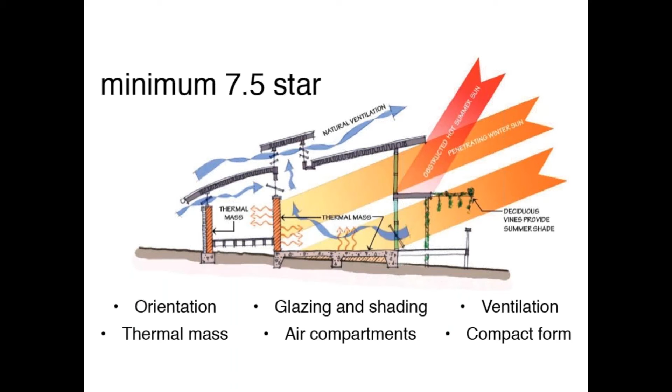This weakness in the system can be addressed with a few relatively simple measures, and they were measures we employed for the Mullum Creek eco-housing project in Donvale, Victoria. So there we required that energy ratings to 7.5 star be undertaken using AccuRate and by one assessor, for which we nominated an independent and rigorous assessor for all homes across the estate.

And once construction was underway, we provided lot owners with a free inspection service to ensure that the thermal performance that was designed into a home was carried through to the final constructed outcome. So both the energy assessments and the construction overview were generously funded by the developer, and that's a family of environmental philanthropists. So Sue, Steve, and Danny Matthews.

In cool, temperate climates like Melbourne, it's not easy to achieve a genuine 7.5-star energy rating. So that's a thermal performance that almost halves the space heating and cooling requirement that's attached to the nationally mandated 6-star minimum that you'll all be familiar with.

We found that homes with anything other than a compact architectural form and a modest amount of well-orientated glazing struggle to reach 7.5 stars without all of the following design features in place. They need to have high levels of insulation in external walls and roofs and ceilings. They'd need double glazed windows with high thermal resistance and high solar heat gain coefficient, so that's for Melbourne's climate.

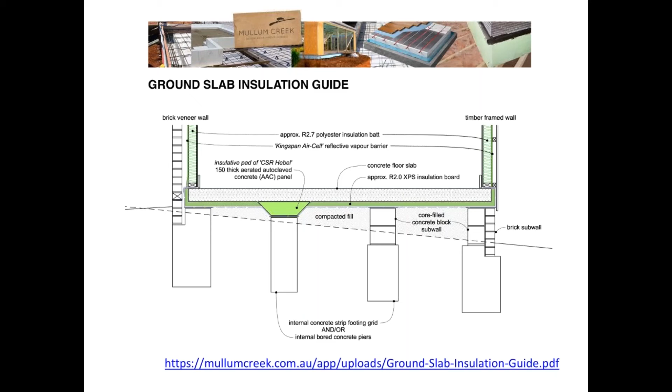Okay, so what about building materials? A report was tabled by the World Economic Forum in Davos in 2018, and it put the world's consumption of materials at above 100 billion tonnes a year. And that quadrupled since 1970. And meanwhile, the population over that period only doubled.

Between 2016 and 2018, this consumption of materials had jumped by more than 8% in just 2 years. Yet the reuse of materials had fallen from 9.1% to 8.6% of all the material that was consumed. According to the CEO of Circle Economy, Harald Friedl, who tabled the report, "We risk global disaster if we continue to treat the world's resources as if they were limitless."

Now, the lion's share of these materials, nearly 40%, is turned into housing alone. The World Green Building Council also tells us that of all carbon emissions attributable to the built environment, 28% are embodied emissions that mainly relate to the procurement of materials used to construct buildings.

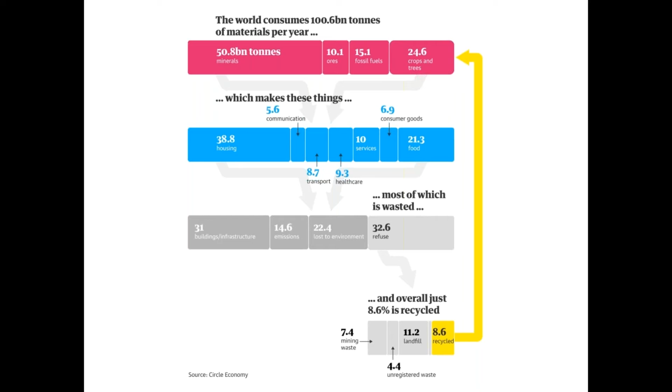There are no really clear figures for Australia on this, but from eTool outputs and the work of André Stephan and Robert Crawford at Melbourne Uni, I'd like to suggest that the ratio between embodied carbon and operational carbon in Australian building stock is even much higher than the global average that I quoted before.

And that's because the floor area attributable to each occupant in our homes and our workplaces, as well as the volume of vacant buildings in our cities and at our holiday destinations, are higher than almost anywhere in the world. You can see from this infographic from Stephan and Crawford that as building size per occupant increases, operational energy use increases as well, but at a lower rate, and that's as you'd expect.

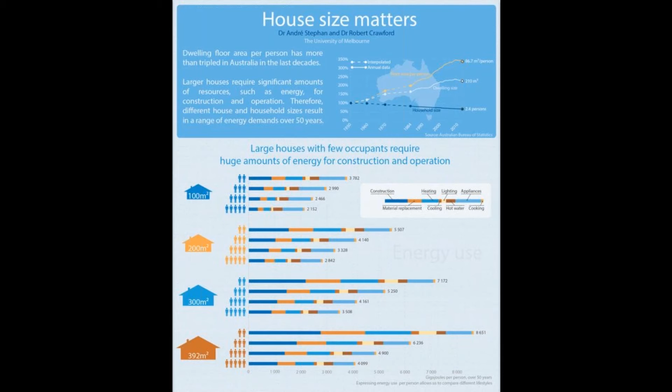Secondly, we have a relatively benign climate through most of Australia, and that moderates heating and cooling loads. And thirdly, our newer habitable building stock in Australia generally has better thermal performance, appliance efficiency, and maintenance than that in much of the developing world, where construction has charged forward to lower performance standards and at a blistering rate.

Per square metre of floor area, and I'll stress per square metre, it's fair to say that the operational energy and water efficiency of buildings in Australia is slowly improving. What this means, though, is that the materials used to construct them remain the primary driver of the overall life cycle environmental impact.

So services and appliances can be upgraded to embrace new technologies and to provide improved energy and water efficiencies through what needs to be, these days, a long service life for all buildings. But our specification of building materials commonly comes with more serious and immediate environmental impacts that are irreversibly locked in as construction begins.

So if you're building a home today, say a 6-star rated home, sort of the nationally mandated minimum thermal performance, you can see here the overall life cycle environmental impact and the relative components of each. So a good half goes into construction and repairs and maintenance, and then the other half goes into operational emissions and energy use for the life of the building.

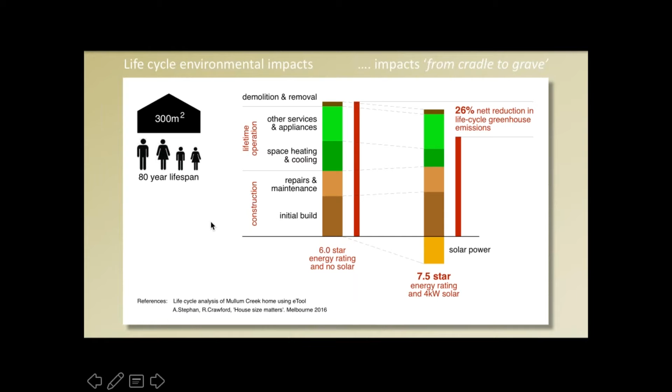Okay. If you believe the science as it's presented to us, what matters most now is how deeply and quickly we arrest CO2 emissions and biodiversity collapse. If we don't move mountains in the next 5 to 10 years, our future on this planet will be very bleak indeed. It'll be very hard for us to play catch up to get us back to a livable climate.

So if you have a new building in design on your desk, its overall environmental impact across the next 10 years, this period of emergency like none we've ever faced before, will be tied almost entirely to its construction, because its life cycle operational impacts will have only just begun to take effect in that period.

There are tools available to measure and verify life cycle environmental impacts, so embodied and operational impacts, such as carbon emissions, water use, toxicity, ecosystem degradation, from cradle to grave. You'll have heard of those terms. There might be some terrific ones out there, but those that I've engaged with can tend to draw on inflexible assumptions about the future. They can produce quite different outputs from the very same entry data, and they result in reports of only limited benefit considering the time and money that goes into them.

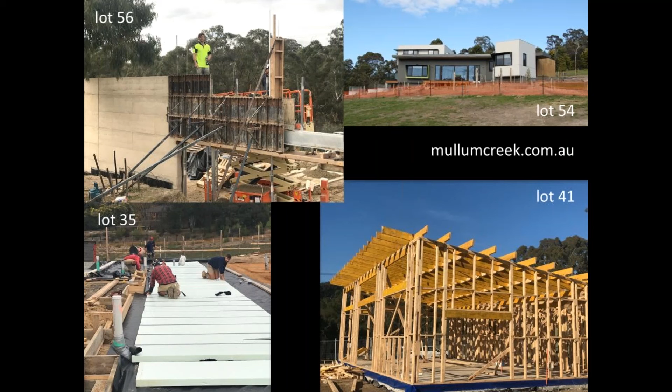So let's start with cement and concrete. The World Green Building Council, Beyond Zero Emissions, and other respectable sources all agree that the manufacture of Portland cement accounts for a whopping 8% of the planet's greenhouse gas emissions. So roughly the same globally as the entire transport sector. It's hard to believe, but it's true.

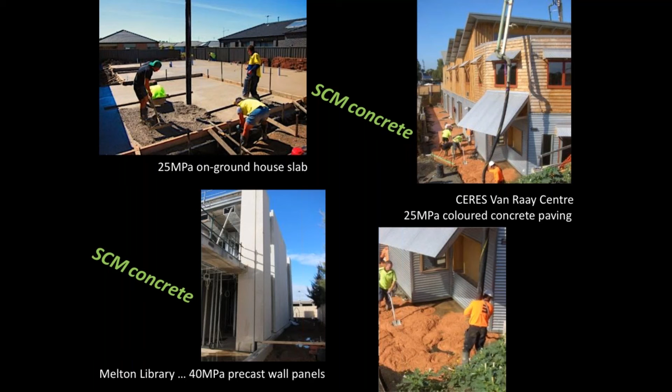But there are alternative, equally effective and readily available concrete binders, such as fly ash, which is a waste from coal-fired power generation, and slag, which is a byproduct or a waste from steel smelting. These alternative binders are collectively referred to as supplementary cementitious materials, or SCMs, and they're now readily available. The Mullum Creek Design Guidelines required that SCMs make up a minimum 30% of the cement used in wet mix structural concrete. And some architects and engineers chose to increase that up to 60% where surface finish wasn't critical.

As construction commenced on the estate, we found that more and more local batching plants were supplying concrete with SCMs with no increase to supply cost. In time, this concrete with SCM should be considerably cheaper, because slag and fly ash are problematic industrial wastes that are otherwise expensive to dispose of.

Also these days, we're going further and further from our cities to source virgin rock and sand for our concrete. The sand can't be weathered and rounded in the way that beach and desert sands are, where most sand comes. The sand for concrete needs to be angular to create a good structural matrix. And so it's surface mined from recent sedimentary deposits that lie beneath often delicate natural landscapes. In the global context, it's acknowledged now that we're about to simply run out of virgin angular sand.

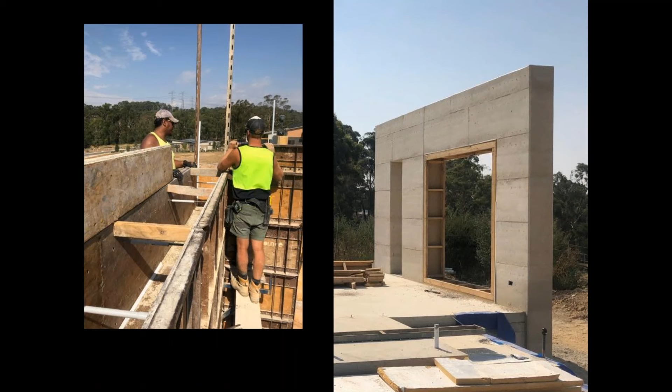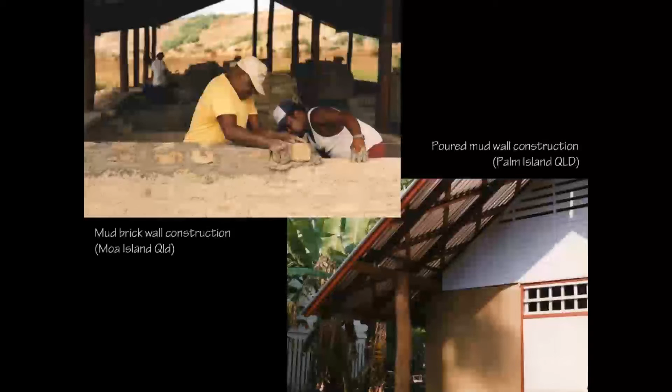When I was a young bloke, we built a lot with rammed earth and with puddled mud. We put effort into selecting and blending aggregate with the right gradation of particle size and colloidal content to achieve good strength and weatherability for walls without the need for cement at all. We followed the CSIRO National Building Technology Centre's Bulletin No. 5, and that's on earth wall construction. And we did the old-fashioned thing of erecting test panels before proceeding with every build.

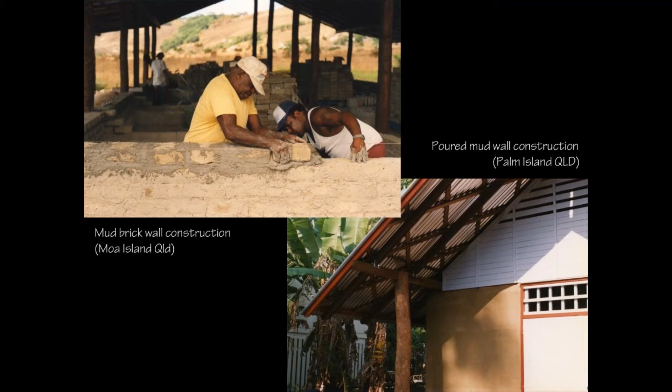What about steel? I think there's nothing wrong with a sheet of corrugated iron. Coated steel wall and roof cladding provides an expanse of robust and almost maintenance-free cover that's difficult to surpass at less than 0.5 millimetre of material thickness.

But check out the embodied energy in just 2 sheets of light SL82 reinforcing mesh for a 120mm thick concrete slab on ground. So the embodied energy, or the carbon footprint of that mesh, is about the same as the embodied energy in the concrete itself. So here it's the 20 MPa concrete with only Portland cement as its binder. When 40% of the Portland cement in that concrete is substituted with SCMs, the light steel reinforcement ends up having the more dominant carbon footprint. Again, you wouldn't think that, but such is the potency of steel.

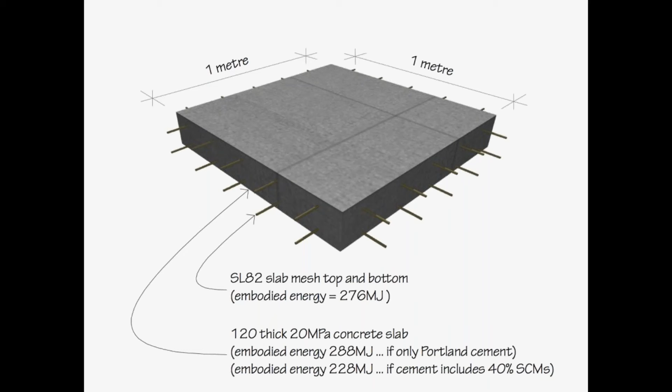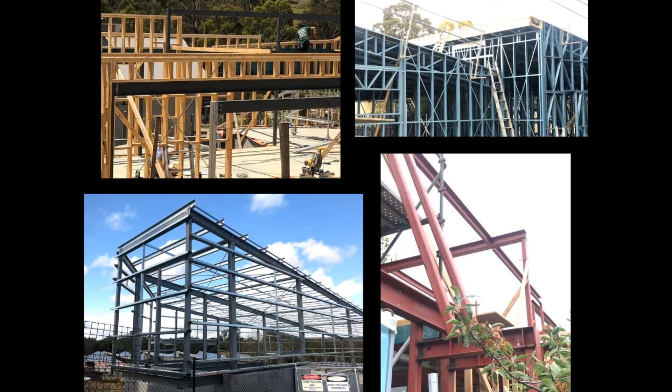So reducing the amount of weighty steel in construction, particularly structural steel, is one of the best ways to minimise embodied carbon. In too many simple structures, I see steel used where substitution with a sustainably sourced timber would have been a cost-saving no-brainer. On some building sites, it's almost obscene. The Mullum Creek Design Guidelines include a requirement prohibiting the use of cold formed steel framing, but the use of hot rolled steel is permitted on that estate. I learnt more recently that Currumbin Eco Village in Queensland prohibited hot rolled steel without undue resistance from designers and builders and engineers. So in retrospect, I think we could have done this too at Mullum Creek.

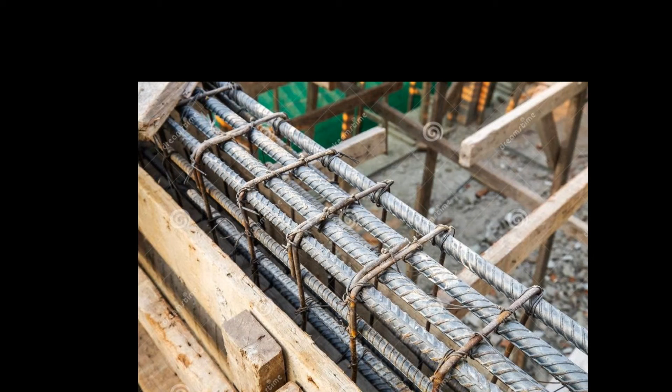We need to start questioning architecture on our drawing boards that relies on highly reinforced concrete and hot rolled steel to stand up. We need to ask ourselves why such structurally demanding designs are even necessary. Are we chasing building heights that are simply unsustainable, also by social measure?

Has our architectural flair for gravity-defying cantilevers overtaken our responsibility to design light and lean in response to the emergency that we've got before us? What other less impacting materials could we use for these structures?

You'll see it everywhere. Wood is good. Wood, the ultimate renewable. Responsible wood. Make it wood. Well, contrary to popular belief and some heavy marketing, timber can be the very best, or it can also be the very worst material that you'll work with as a building designer or a contractor, depending on where and how it's sourced.

If it's sourced sensitively, it can store carbon through and beyond its service life in construction. It can be reused or recycled, or it can be harvested from deliberately planted and sensitively managed forest, helping to maintain healthy ecological processes, sequestering atmospheric carbon, and contributing to the social and economic well-being of rural communities.

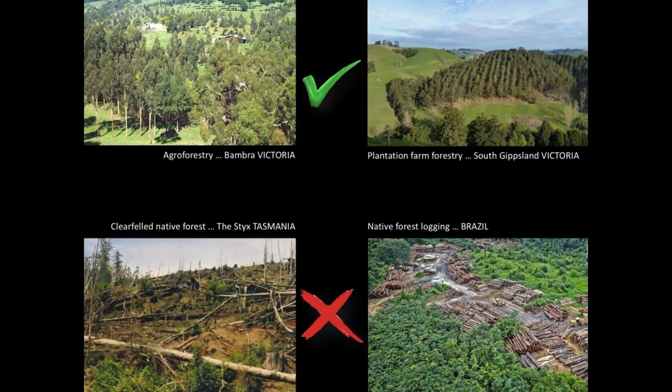Even before our Black Summer commenced in September last year, deforestation was responsible for some 17% of global greenhouse gas emissions. Unfortunately, the bulk of structural and architectural timbers that we specify in Australia are sourced in ways that contribute directly and indirectly to this forest demise.

The laundering of illegally harvested forest woods into massive and opaque timber supply chains, some of it with PEFC or FSC environmental certification, stands as the largest illicit business on the planet behind human trafficking and narcotics.

Over the past few years, our Bunnings stores have transitioned their sourcing of softwood framing timber away from fast-grown radiata pine, from temperate climate Australia and New Zealand plantations, towards slow-grown Baltic pine from cold climate Russian and Eastern European forests, often native forests. This transitioning comes in on and off waves, and I think we're entering into another one in the next few months.

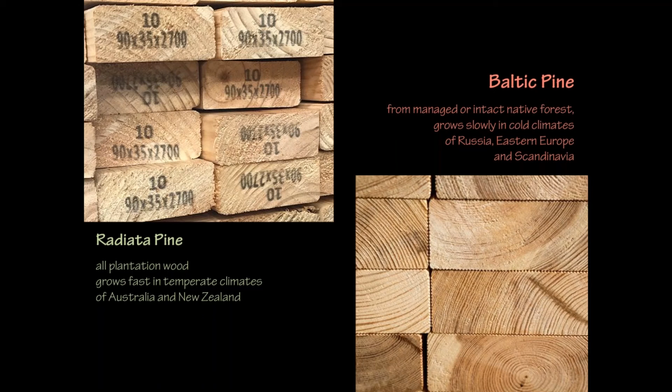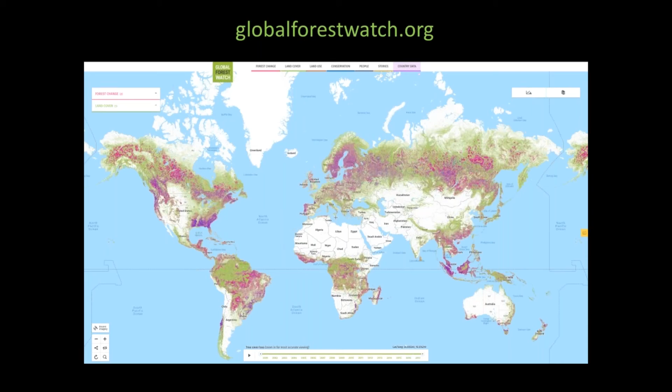In Australia, it's our tall and relatively intact sclerophyll forests from which the durable, stable and attractive native hardwoods for architectural applications are mostly extracted. So cyclical clear felling of tall, wet sclerophyll forests in often mountainous terrain depletes biodiversity and other ecosystem services.

It encourages a regrowth that's thick with ladder fuels and causes exposure-related dieback of the often lone habitat trees that are left standing. And this then exacerbates wildfire risk as well. These damaging impacts are now compounded also by a hotter and drier climate, as I know you are well aware of as a result of last summer.

Just over a year ago, our country's high labour costs and the slowly rising environmental concern saw at least a good portion of Victoria's remnant native forest protected from logging. Conveniently at those times, we, and by that I'm thinking particularly of Bunnings, turn again to the tropical rainforests of poor Southeast Asian and Amazonian countries for our Cumaru decks and our Merbau window joinery and our Meranti.

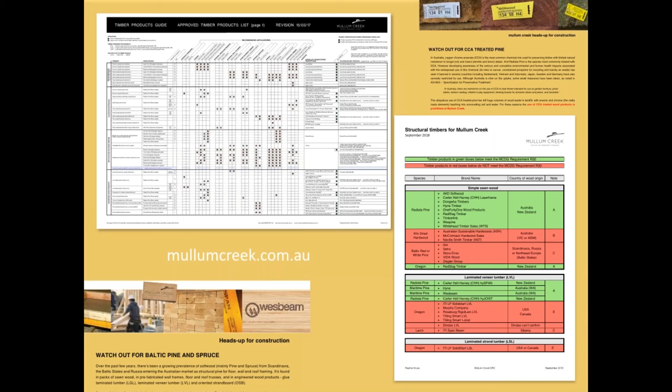We've been really pleased and a little surprised with how designers and particularly builders at Mullum Creek are, with minimal resistance, embracing the sustainable timber products we're requiring them to choose from. And we know they're carrying this new product awareness also to their other jobs beyond the estate. And that sends a strong message to the timber industry that a new generation of designers and builders will only entertain wood that's sourced with true environmental and social responsibility.

Over the past 5 years, pretty well everyone in my office has volunteered with CERES. That's the Centre for Education and Research in Environmental Strategies in East Brunswick, Melbourne. And they volunteered there to extend the timber initiative from Mullum Creek into the launch of a new social enterprise, CERES Fair Wood. The profits from CERES Fair Wood all go back into CERES Community Environment Park. Fair Wood removes itself from the adversarial native forest debate and from opaque environmental certification schemes.

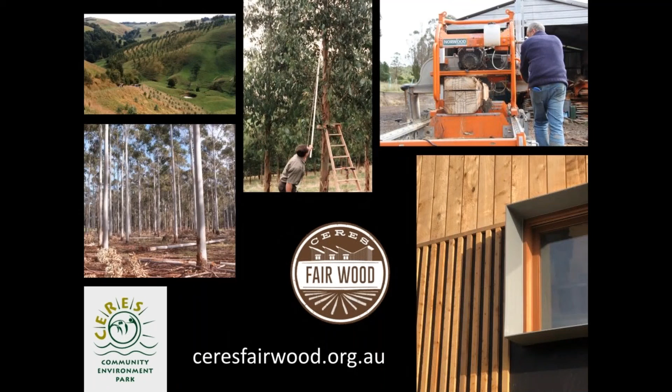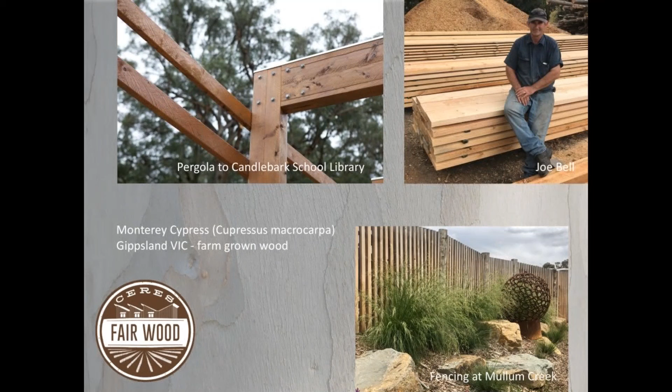Peter and Hayden at Fair Wood aggregate and retail timber inside short local supply chains with Victorian and Tasmanian tree farmers and portable sawmill operators who they know personally. These are mostly small producers who are geographically dispersed and singly they struggle to find, sell and deliver to a market that's going to fully appreciate the farm-grown trees and the timber that they've got on offer. So Fair Wood buys only from growers and millers who source wood to the highest standards of environmental and social responsibility, as it's informed by the Mullum Creek project.

Fair Wood shares the stories of these growers and millers directly with its customers, who are building and landscape contractors, furniture makers, and of course DIYers. Fair Wood builds direct friendships and understanding between city and country folk, and it encourages farming families to revegetate their bare paddocks with trees, both for conservation and for profit. And the customers are assured the supply of the most environmentally and socially responsible products that Fair Wood can source as a not-for-profit social enterprise whose proceeds feed back into all the other terrific things that happen at CERES Community Environment Park.

On its website, you'll see that Fair Wood has a limited selection of farm-grown and salvaged woods that are available as decking, wall cladding, flooring, joinery and landscape timbers. It's also recently acquired a substantial warehouse that'll now allow it to gather larger and broader stocks of very responsibly sourced wood. In the next while, I'm hoping to support Fair Wood to become also a timber broker. So as an extension to the CERES Environmental Charter, Fair Wood will provide designers and builders with project-specific timber schedules based on architectural and engineering documentation that's submitted to it.

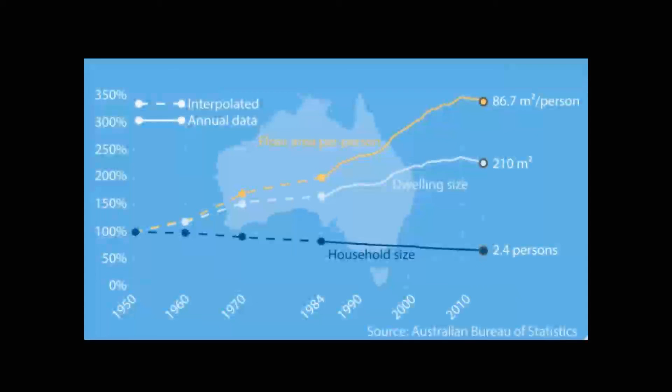Another terrific infographic by Stephan and Crawford shows how in just 26 years between 1984 and 2010, house size across Australia nearly doubled from 50 square metres to a gobsmacking 87 square metres per occupant. How much house is enough? How much of the Earth's material and energy resources are needed to comfortably house an Aussie? There's nothing sustainable about an 8-star 400 square metre home.

Going forward as building professionals who care, can we simply refuse to serve clients who ask us to work on homes that already have or will have a floor area greater than, say, 60 square metres per occupant or per bedroom? By now, I guess some of you might be hating me.

Can we at least impress on our clients that quantity of construction drives precious material consumption and carbon footprint upward, whereas quality of construction calls on smart design, on craftsmanship, and good work for people, rather than on the limits of our planet.

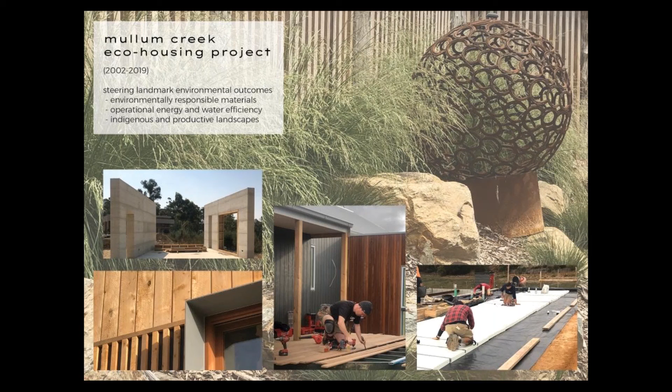Putting concern about building scale aside, the Mullum Creek project will certainly serve as an exemplar for site-sensitive building and landscape design. It'll showcase energy-efficient architecture, and it'll promote the use of environmentally responsible building materials. So the things that you'll see in place on the estate. But I reckon its bigger legacy will be in published and freely shared learnings, which is a welcome change from guarded IP. And the advancement of people, so lot owners, designers, builders, who've been able to engage with the project.

Just the other week, Design Matters awarded this home at Mullum Creek the 2020 Australian Building Design of the Year. So all the quite rigorous ESD requirements that guide the design and construction of homes at Mullum Creek, including those I've flagged here on material selection, still leave plenty of scope for fine architectural expression, as you can see here.

Okay, to finish off, I'd quickly like to take you through a few other jobs of mine to illustrate a bit more how the materiality of buildings can support sustainable futures. Some years back now, I worked at Candlebark. It's a small independent school established by John Marsden, who has also written a string of novels for teenagers, the Tomorrow series being the most popular.

Again, many a timber engineer would argue that shaped timber portals like these need to be fabricated off-site using some very fancy machinery. The business behind off-site fabrication often benefits only a few people who have the capital to invest in such expensive equipment. You won't see many people employed on these factory floors.

When we speak about sustainability, we often focus on environmental sustainability, but social sustainability is the other key to a future that's kind to our natural world and that's equitable for all people. And for the most, capital-intensive industry is not as equitable as labour-intensive industry for obvious reasons.

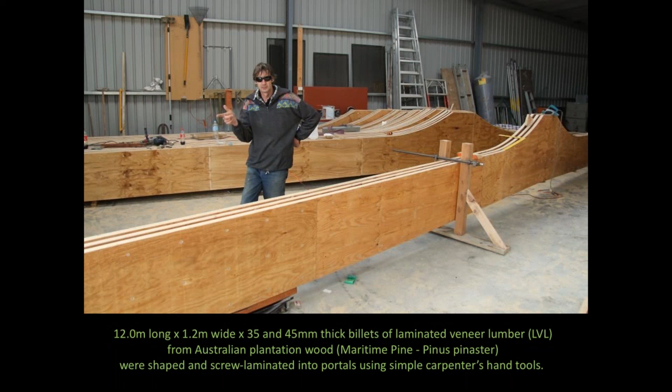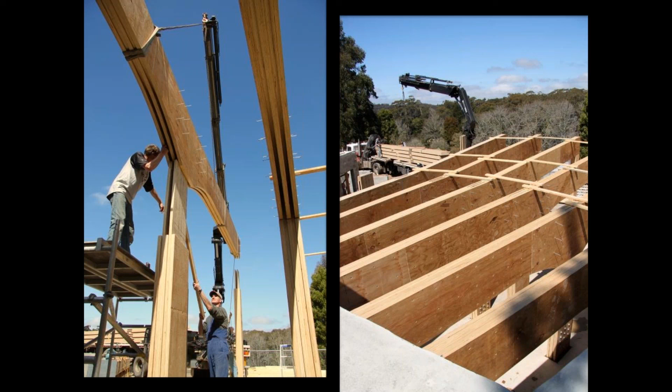Portals for this school library turned out to be an inexpensive 2-week fabrication task for just one very smart country carpenter, Russell, and his apprentice, Jared. And they just used basic powered hand tools in a nearby farm shed to the school. So there were no robots here. The portals then took only 3 days to erect on site.

And you can also see here how the 5 billets of LVL that make up each portal have been screwed together. So we avoided glues in this lamination process. And that means that these LVL billets can easily be dismantled and repurposed when the building comes to the end of its useful life. Designing for material reuse saves on natural resources. So that's a good objective to follow.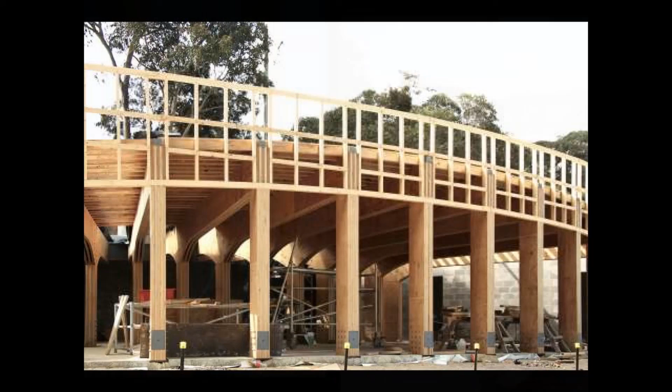And all the LVL offcuts from the shaping of the portals were ripped up into purlins, which in turn were then screwed down onto the portal beams. And before then, those same LVL purlins and the structural plywood roof substrate, which is Carter Holt Harvey EcoPly, had a pre-use as temporary formwork for a concrete slab beam that provides lateral restraint to the curved reinforced concrete block retaining wall that runs around the back and the sides of the building. So minimising material wastage is another important objective in sustainable building design.

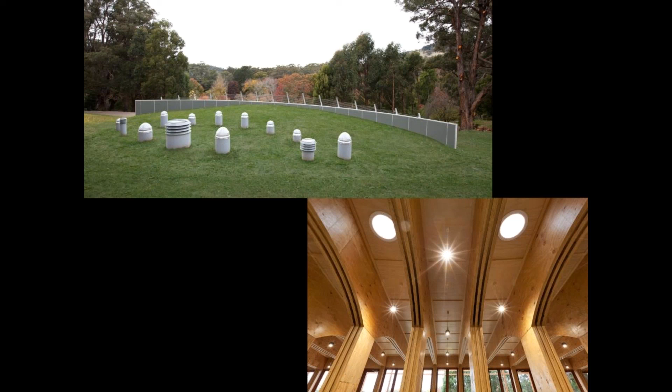I'm not a great fan of green roofs and walls when they're incorporated at height as a shroud to a city building. But site constraints here made it sensible to have this school library come wildfire shelter constructed into the side of a hill with an earth-covered roof. In combination with substantial insulation that was necessary for the southern climate here, this earth cover provided exceptional thermal performance and obviously terrific wildfire resistance.

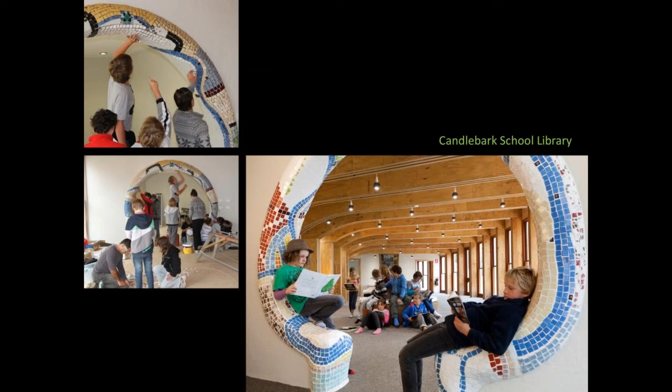At Candlebark School, I could see that design technique and construction method kept simple and accessible to local people, in this case the school community, allowed them to maintain command of and pride in the whole of the creative process. And whilst I've spoken highly of some engineered wood products, be mindful of capital-intensive material manufacturing processes that don't necessarily improve social sustainability. Keeping things simple can help to share work, skills, and wealth more broadly. And post-COVID, I think this will be really important.

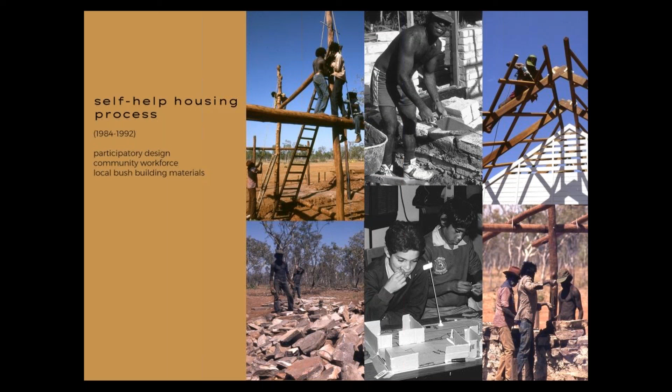I spent the first 10 years as an architect up north, helping Indigenous communities to design and build for themselves using materials straight out of the local bush. So stone, earth, and crushed anthills, bamboo, as well as raw pole and chainsaw mill timbers. And we adapted simple construction methods that were suited to the community workforce. And they were men, women, and children, all with different levels of health, strength, and skill. It was stacks of work, but these people had time on their hands and they were keen to learn.

And so by this self-help approach, they got to own their own homes, and they were built at a tiny fraction of the cost of pretty crappy government-built homes that they'd otherwise need to rent. Here, local materials and simple work methods built good homes as they built community and social resilience. In other words, architectural process can engage materials for economic, social, and environmental sustainability. These days, it's too easy for me to get knotted up in unnecessary design complexity. But I'm not suggesting that we must go back to basics and shun new technologies. Check out this fabulous enterprise in the USA that I stumbled across last week.

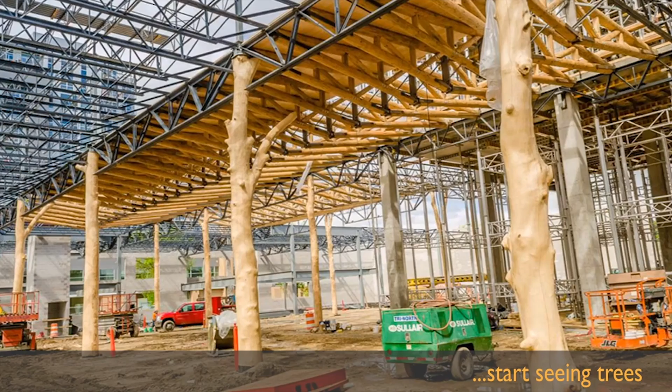So WholeTrees Structures, it marries 3D scanning and BIM technology with the natural beauty of trees and the unsurpassed strength and minimal waste of timber when it's used in the round. In doing that, it can elicit exquisite biophilic architecture from designers like you and me. I just love it.

And finally, when we're looking to materials for sustainable futures, we could propose that a green building needs to be one that's already there. We should delicately rework existing buildings where we can, apply our finest design skills to minimise natural resource depletion and to give our planet a chance to heal. Accept that a gentle architectural touch might not catch the eye of today's glossy magazines, but know that future life on Earth will be thankful for it.